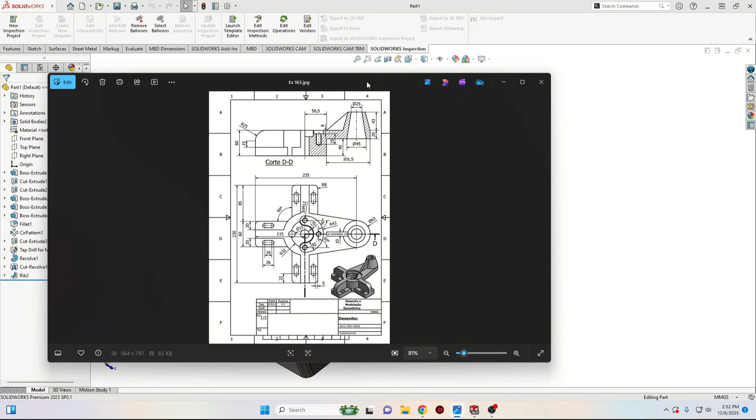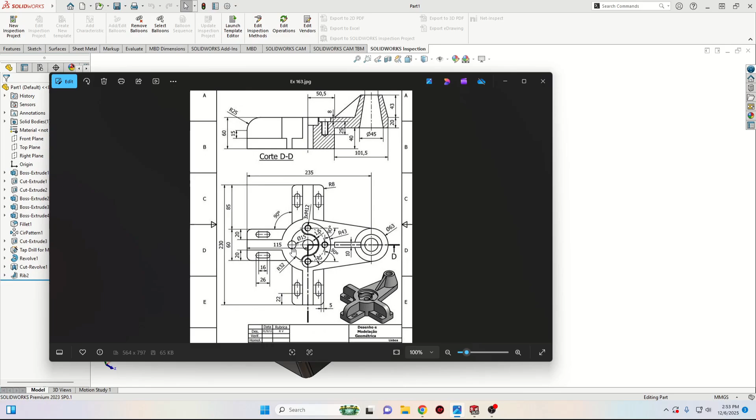And we have here the drawing. Maybe I cannot find them, but I think we have some dimensions that are missing. For example, for this hole in the center, the small one, I couldn't find the diameter, so we're gonna adjust it, we'll take one. And for this shape here, for this cut, we can also see it right here, I couldn't find the depth, so we're gonna take it smaller than 20 but bigger than 8, so something around 15. And for this hole I think it will be bigger than 15 because it looks bigger than this one, and smaller than 25 because it looks smaller than 25, so it will be 20.

Alright, now let's go ahead and start. This is how it's gonna look at the end.

First let's open a new SolidWorks document, select here part, press here OK. And now let's make this plain white and let's open a sketch in the top plane.

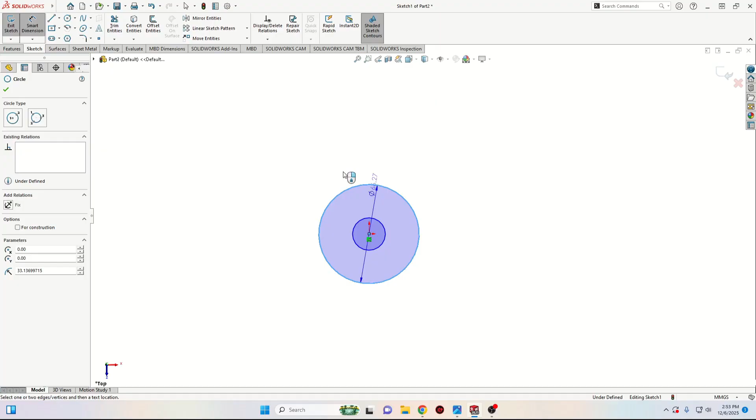Here we'll start with circle, so select circle, make 2 of them. With smart dimension let's define them first. First here will be 101.5 the diameter. And now the diameter for this one I said that we're gonna take it 20.

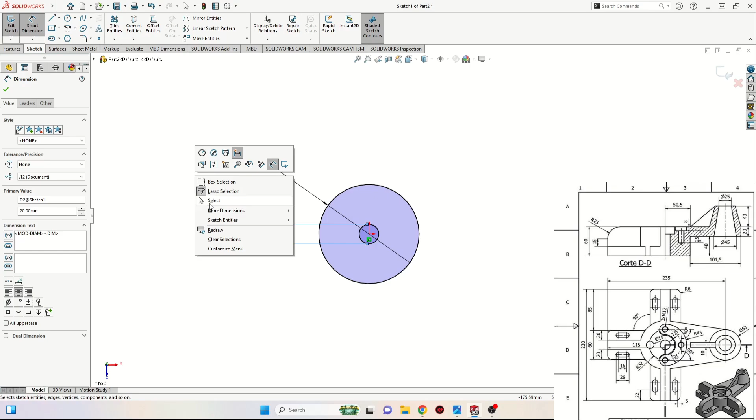Now go to features, use extruded boss base command. And here the thickness will be 60 millimeters. Press here OK.

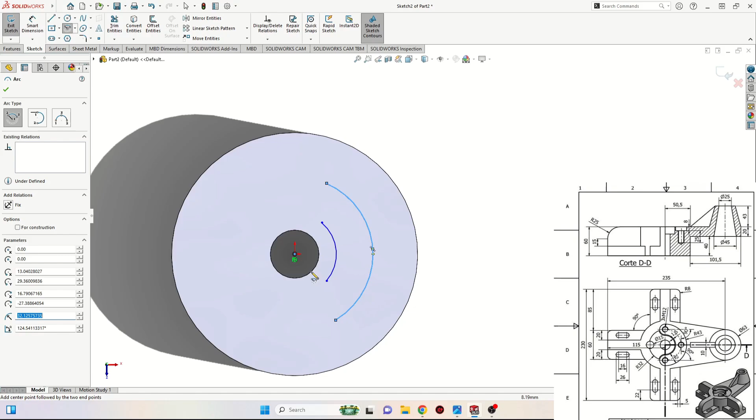Now let's open a new sketch on this face, and here let's make the next sketch. We'll select center point arc, and we'll make one arc like this, and then we're gonna make another one like this, and then we'll select tangent arc, and we'll make here one, and on this other side another one. Select these points and select here make tangent.

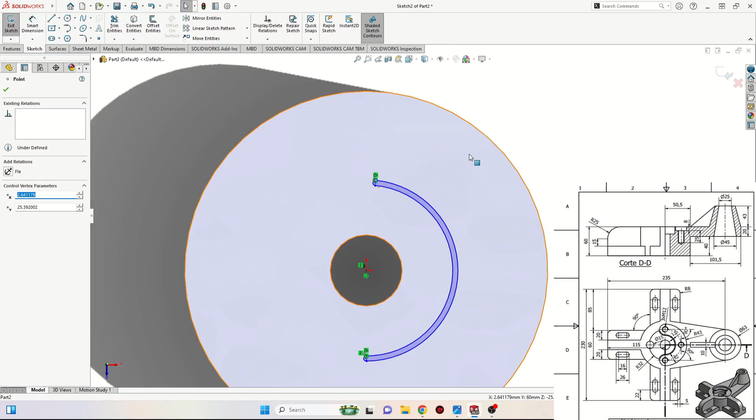Alright, and now select this center point with this one and select here make vertical. And now let's do the same with this other one, vertical. And now let's give a radius for this one, for the bigger one, and the radius will be 43 millimeters. And in between these two, here will be 22.

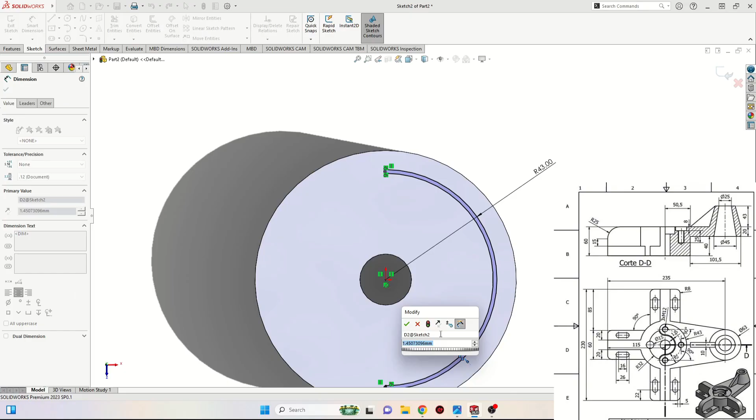Alright, and now go to features, use Extruded Cut. And here the depth for this is 8. Press OK.

Alright, now we're gonna use hole wizard to make 3 holes here. We're gonna select this one, hole. Here is no standard provided on the drawing, so we're gonna use ISO. We'll select here tap drills, and the size will be M12. It's going to be 3 holes. Here end condition will be blind, the depth will be 25. Make sure that this one is selected.

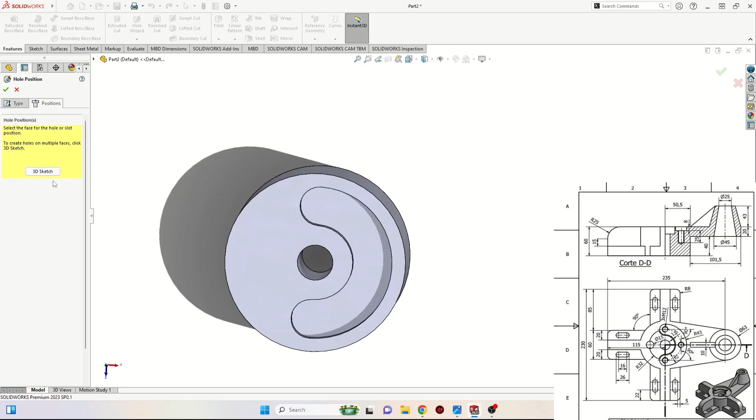Now go to positions, 3D sketch. And now to place the first one, go near this side, and then this center point should appear. Place it right there. For the next one, we're gonna do the same. For the third one, let's place it like this.

For the third one, we'll have to make a few more constructions here. Select center point arc, and let's make here an arc. Let's see if we can... I think it's not in the... Oh, it's good.

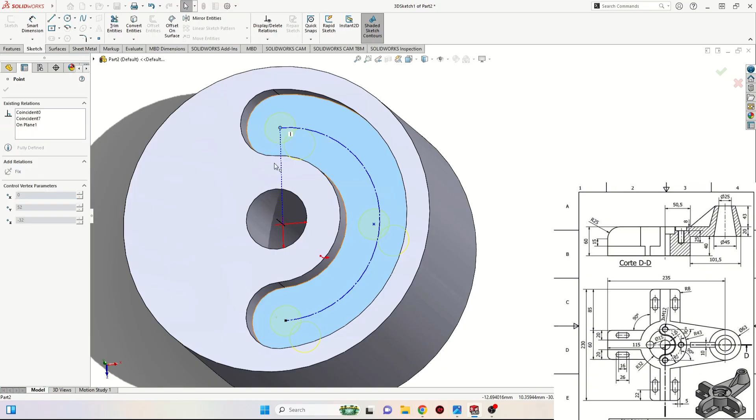Select this arc and select here construction geometry. And now let's see if it's fixed. It's not looking like it's fixed, so let's try to give some dimensions to it. Let's give this radius, okay. For some reason it's not fixed, but I don't think that it matters.

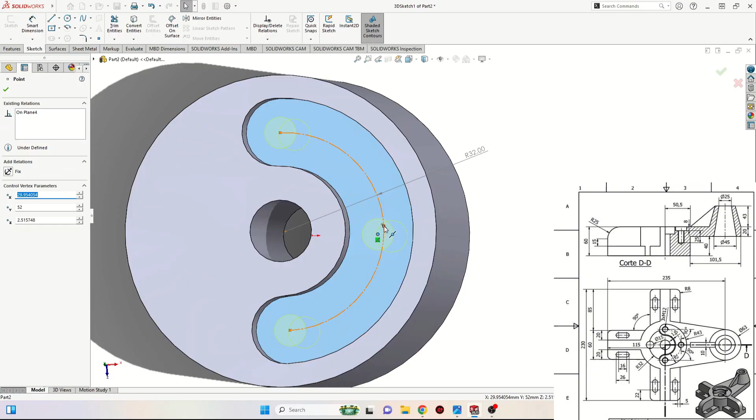And now let's select these 2 points and select here coincident. And now this is how we can place this hole.

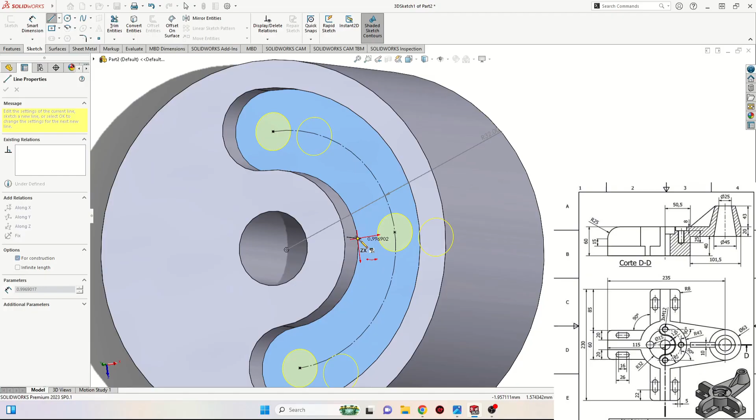If you cannot place it like this, the next thing that you can do is use center lines. Select center line, make a center line, not like this. Make sure that your center line is starting from this edge right here to be on the same face with the hole you want to make. Make it horizontal like this. And then you can either make it fixed right here, and it's going to be fixed. You don't have to add any more relations to it. And then place this point in the middle of this center line, and it will be the same thing. Now press OK.

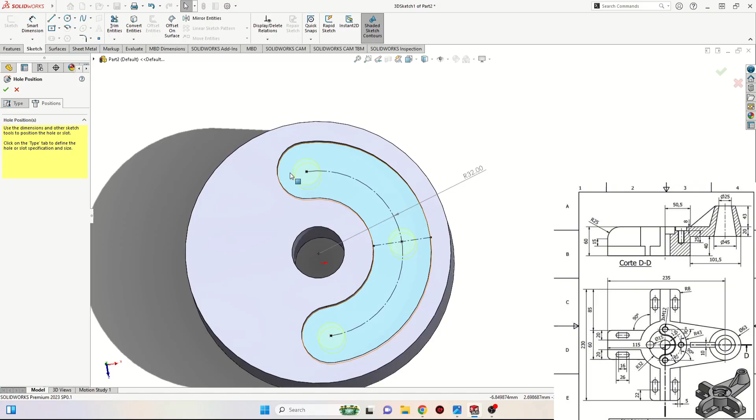And this is it. Now let's select this face and open another sketch. And here we'll select offset entities command, select these 3 arcs. And here the distance will be 1.5 millimeters.

Press here OK. And now we're gonna select center point arc, and let's make here an arc, just like this. Now let's give the radius for this arc, the radius will be 32 millimeters. And now with trim entities command, let's cut these extra parts.

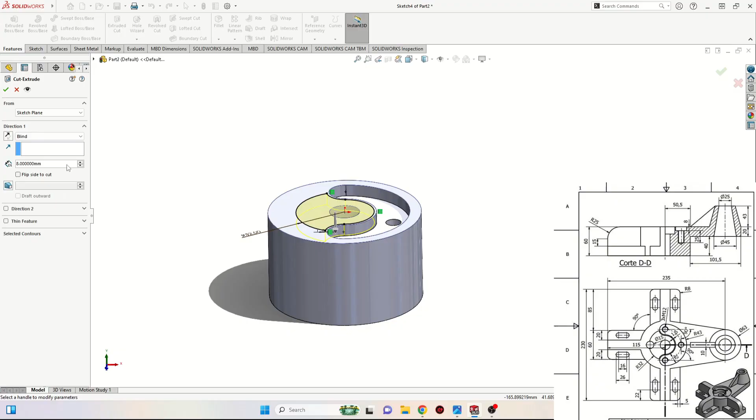Now go to features and use Extruded Cut. This is the depth that we don't have on the drawing, or I couldn't find it, so we're going to take it as 15 millimeters. Press OK.

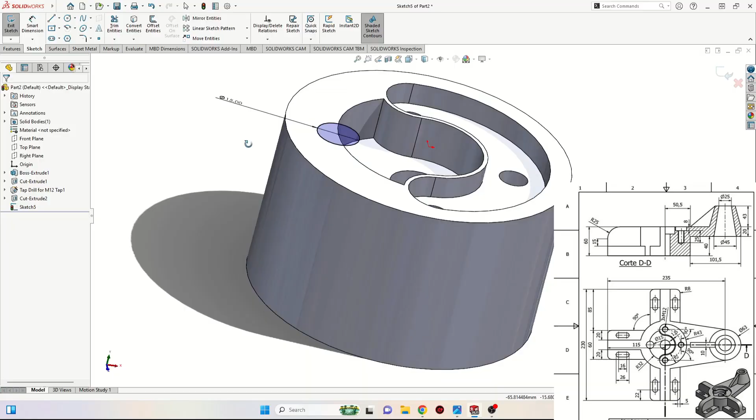Now let's open a sketch on this face again. Select circle and make a circle at this point, with a diameter of 15 millimeters. For this one on the drawing, we can't see if it goes through all this part or only until this face, so we'll make it through all. Go to features, use Extruded Cut, and instead of blind, select through all, then press OK.

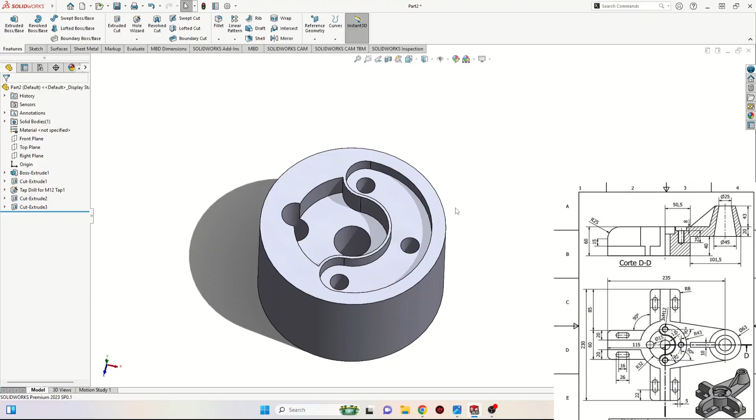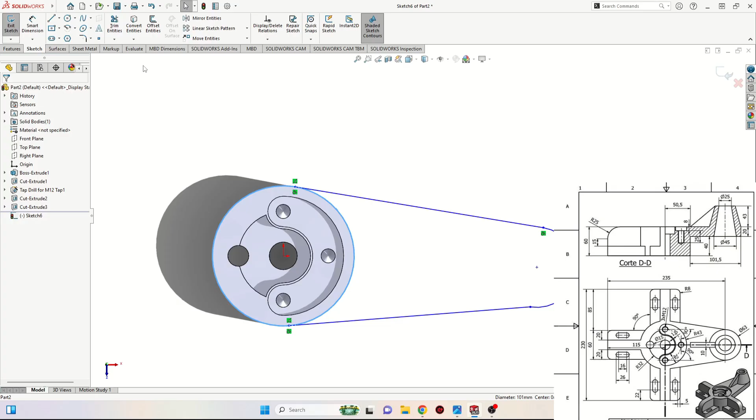Now let's open a new sketch on this face. Select line and start with a line like this, then make an arc like this, and a line back to this edge. Select this line with this edge and select tangent. Do the same on this other side, tangent. Select this arc and this circle and use the convert entities command. With trim entities command, cut this extra part.

Now let's make this point also tangent. Select this point with this one and select make horizontal. Now with smart dimension, let's give a radius here. We can see on the drawing the diameter is 63, so the radius will be 31.5.

On the drawing we can see that from this edge to this circle is 101.5 millimeters. Let's give a dimension from this point to this other point, so here will be 101.5 millimeters. If you cannot select these two points, go up and select point, make sure to place them at these points, and then you'll be able to select them.

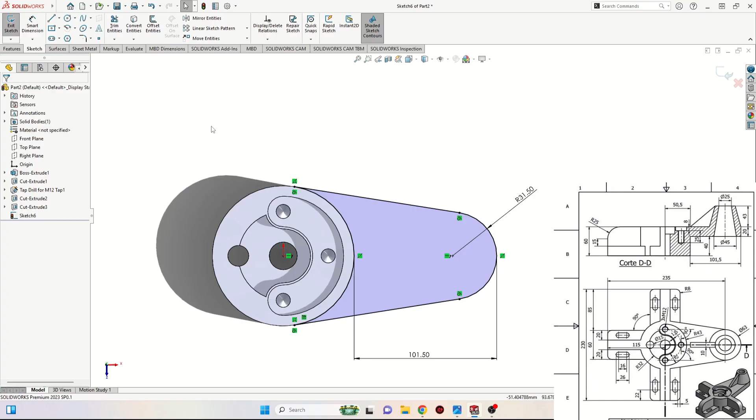Now that we have this, let's go to features and use the extruded boss base command. The thickness will be 20 millimeters. Make sure it's going down, so select reverse direction, then press OK.

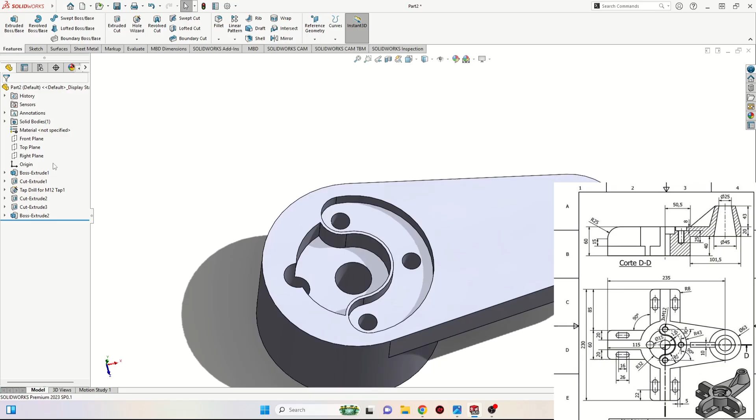Now we'll open a new sketch in the top plane, so select top plane and make the next sketch. First, let's make hidden lines visible, so go to display style and select hidden lines visible. We need to see this edge right here. We'll select line and make the next sketch.

Select this point, make it coincident - sorry, tangent, I mean coincident. Make sure these two are vertical and this one is horizontal. Select these two lines and make them equal. Now with smart dimension, let's give a dimension for this line, here will be 60 millimeters.

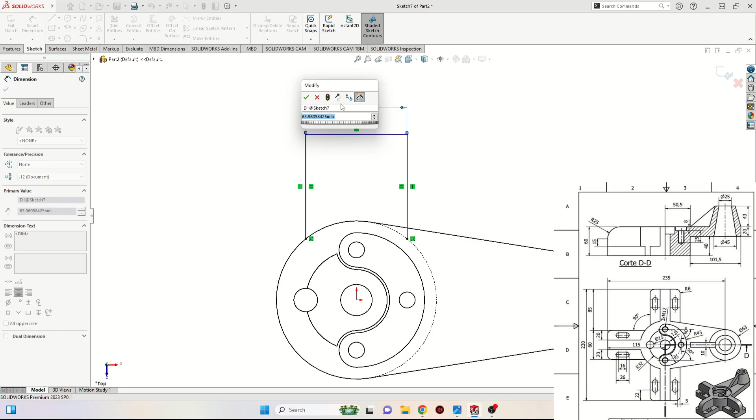We can see on the drawing that from this center point to this line is 115 millimeters. So, 115.

Now let's select center point arc and make an arc here. Right now this is almost finished. Select center line, let's make a center line, make it vertical and in the middle of this part.

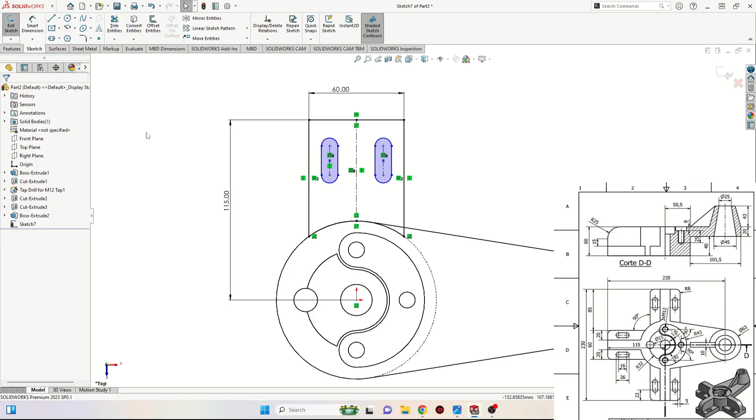Now we're going to select the slot command, straight slot. Make one just like this, then select this straight slot with this center line and select mirror entities command. Now with smart dimension, let's define this first from this line to this one, here will be 5 millimeters.

And then here will be 16. From this point to this other point, here will be 26. And then from this point to this line, here will be 22.

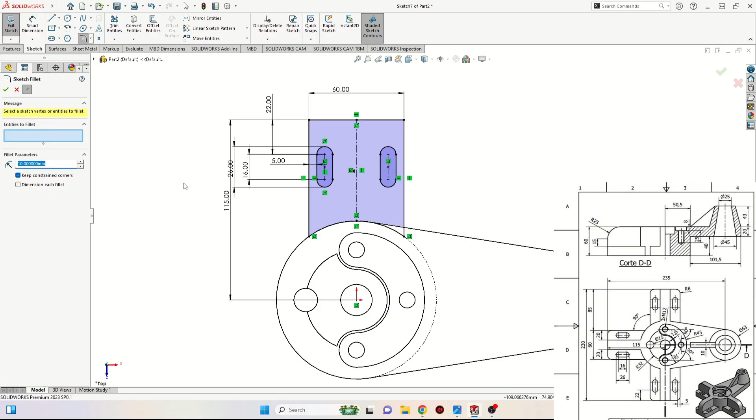Now the last thing we have to do for this sketch is add a sketch fillet. Go up to sketch fillet, the radius will be 8 millimeters. We'll select this corner and this one, press OK, and one more time.

Now this is finished. Go to features, use extruded boss base command. For this thickness, we don't have it on the drawing, but we can find it out.

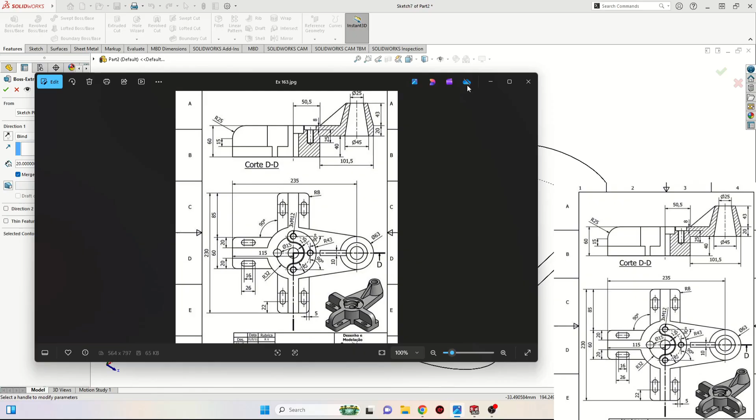Let me show you. We can see that here it was supposed to be, and we know the whole height for this is 60, here is 15 and 25. 25 plus 15 is 40, so 60 minus 40 is 20. This is how we can find this, and we're going to use 20. It's already 20, press OK.

Now let's go to display style to change to shaded with edges. The next thing we'll have to do is select this face again and open a sketch.

Here we'll select line and make the next sketch just like this, and select these two lines and make them equal. Now select this edge right here and use the convert entities command. Select trim entities command to cut these extra parts. Press OK.

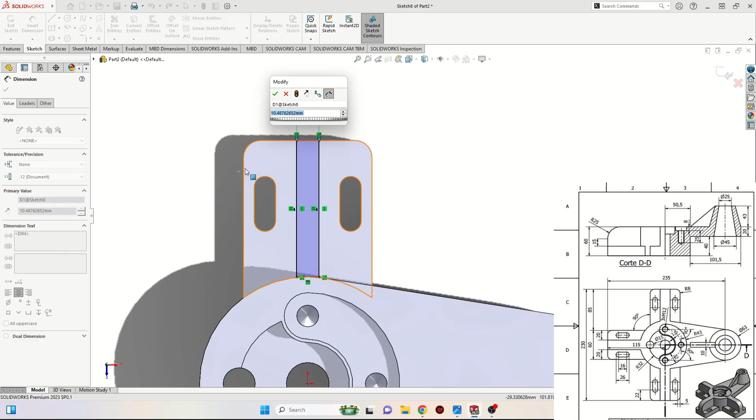Now it's smart dimension, let's give a dimension for this line. We know that from this line to this one is 20, from this one to this one is 20. So this one should also be 20, because from this one to this one is 60.

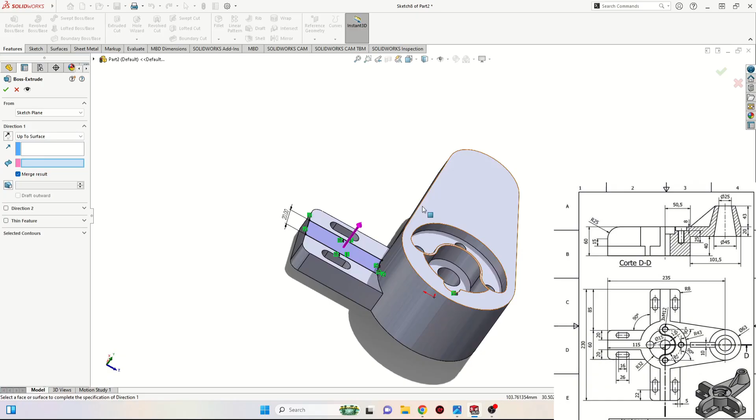Now go to features, use extruded boss base command, and here instead of blind we can select up to surface, and we'll select this face, press OK. Now let's apply a fillet for this edge right here, so go to fillet, the radius will be 25 millimeters, and we'll select this edge, press OK.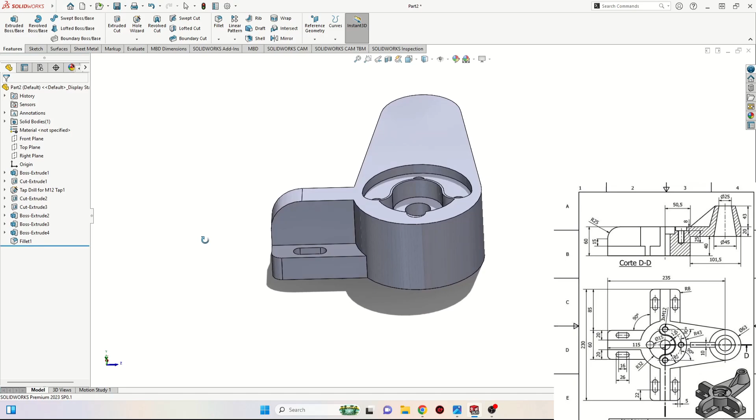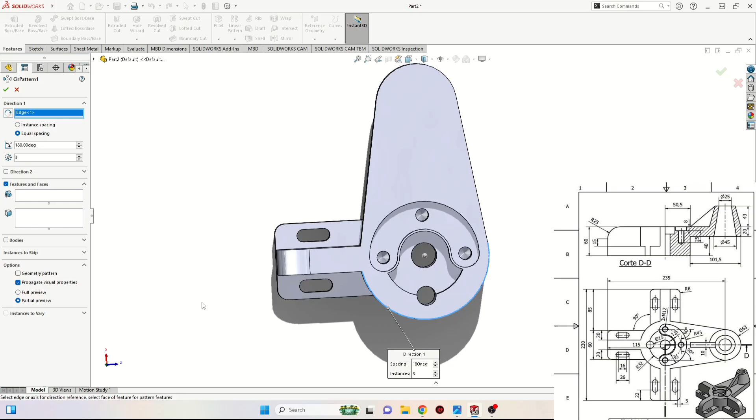And now this one is finished. We need two more of them, one here and one here. To do that, we'll go to linear pattern and select circular pattern. Here the number of instances, we'll keep it 3, 180 degrees, equal spacing. Now for the direction, we're gonna select this round edge. For the features, we'll go to this arrow and select all 3 of this, so the last 2 boss extruded with the last fillet. We can see here the preview, press OK.

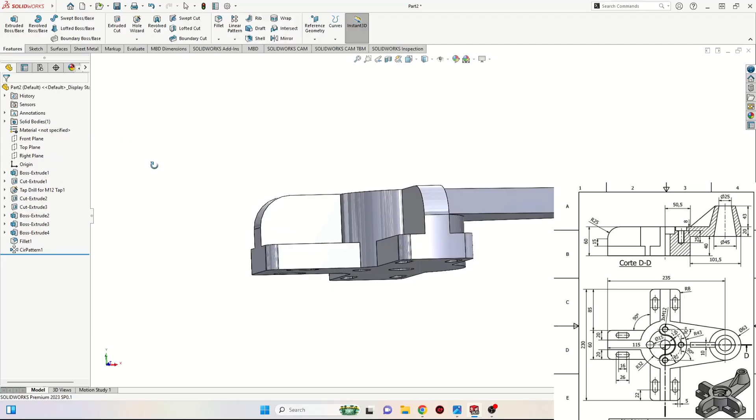And now this is looking good. Now the next thing that we'll have to do is to open a sketch in the front plane. So select front plane, open a new sketch. And here we're gonna make the next sketch, select line.

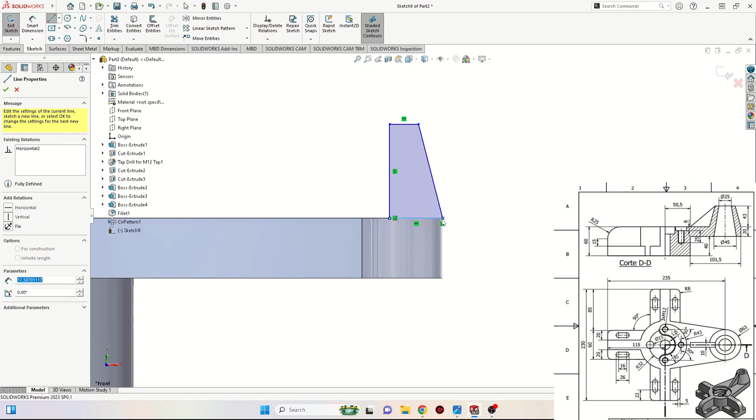We're gonna start with the sketch from this point, go up and like this, and back to this point. Now with smart dimension, let's give a dimension right here. Here will be the radius for this arc. So we know the diameter is 63, the radius is 31.5. Alright, now from this line to this one, here will be 43 millimeters. And we also don't have an outer diameter for this, so here we're gonna use 15 millimeters.

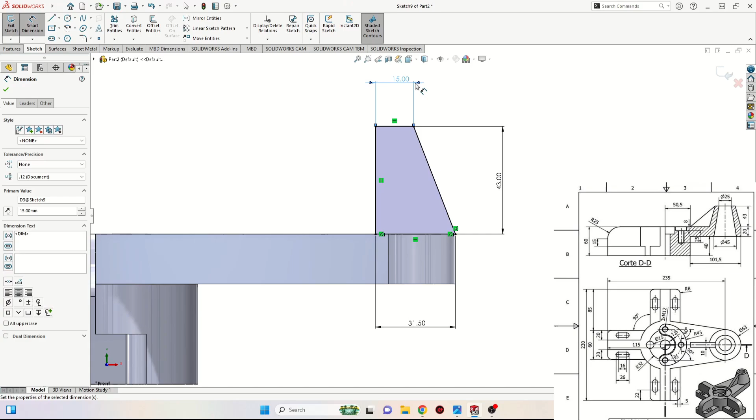Now go to features, use Revolved Boss Base command, and here as axis of revolution select this line, press OK. Or maybe we should have used 20, but we're gonna see in a minute when we're gonna make the next sketch.

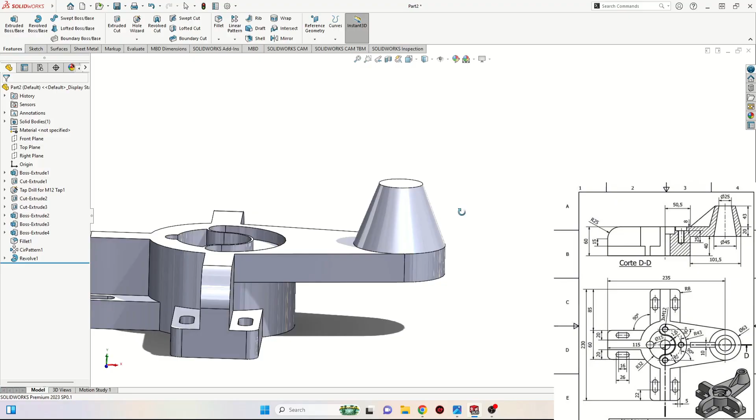So let's select front plane again, open a new sketch. And here let's start with line. We're gonna make a line starting from this point, just like this.

And now smart dimension, let's give some dimensions here. Here we have the diameter 45, so the radius will be 22.5. And here we have the diameter 25, so the radius will be 12.5.

Now go to features, use Revolved Cut, and here as axis of revolution will be this line, press OK.

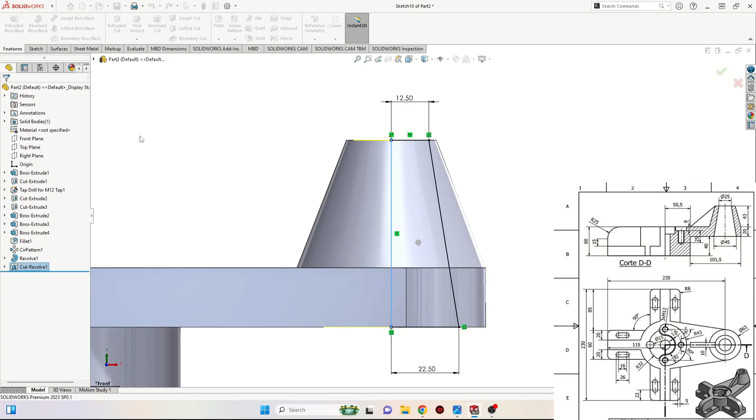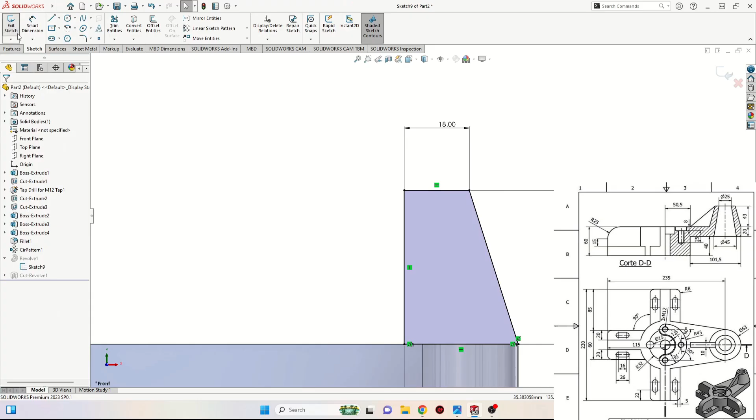Now this is looking a little bit too thin here, so let's go ahead and change it from sketch 9 in my case. Let's make this one a little bit bigger, for example 18 maybe. Press OK and exit the sketch. And now it's looking a lot better.

Now the next thing we'll have to do, and the last one, is to add here a rib. To do that, we're gonna open a sketch in the front plane. So select front plane, open a new sketch. And here we're gonna have to make a line, so select line.

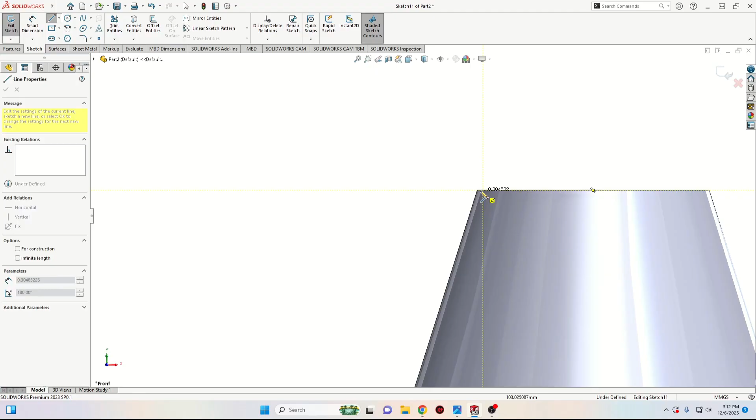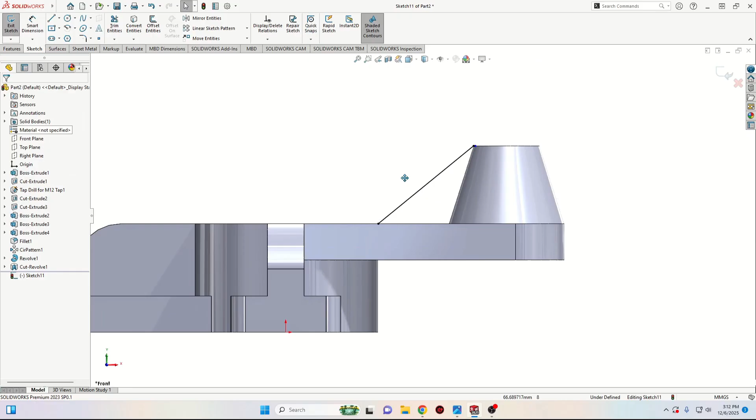For this to work, we should start with a horizontal line until this point, and then go with the line until this edge. And now let's try to select this edge with control pressed, select this point, and select here coincident. And now let's also give a dimension for this one, let's make it 0.2. This should be enough for this line to be in touch with this body.

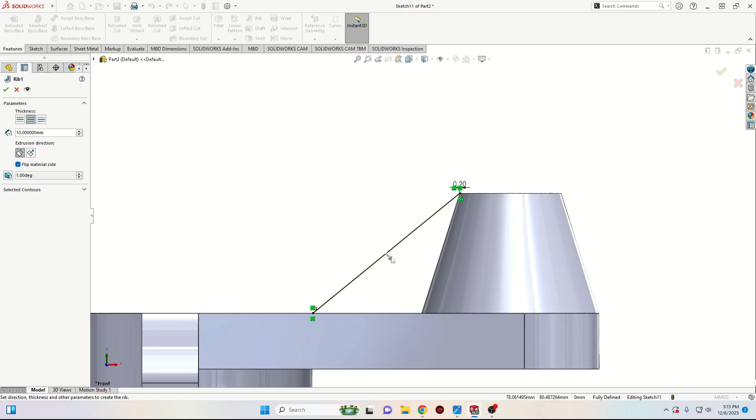So the rib is working. Go to features and use rib command. And here, as we can see, the arrow is going that way, it's not good. Select here flip material side. Now the arrow goes that way and it should be good. Here the thickness is 10 millimeters. Select here this one and press OK.

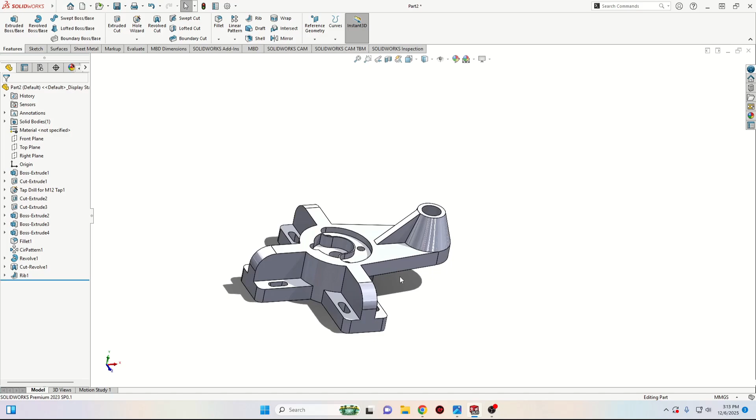Now this is looking good, and I think we made all the things that we had to. Now if you want to apply any material, go on the left to material, right click, edit material, and from here select steel, iron and all the others. Click on the material you want, select here apply and close.